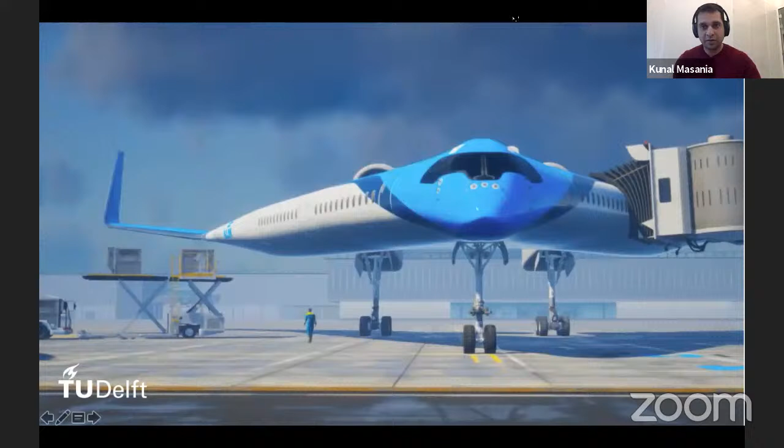So to start, a bit about where I am and why I am here. I'm at the Faculty of Aerospace, and it's a really interesting hotbed full of interdisciplinarity. We work together with experts in aerodynamics, stability, structures and materials, all towards a vision of CO2 neutral mobility.

And you see really cool concepts like the one I'm showing you. This is a Flying V, something we work on together in the faculty, where we hope that in the future we can bring sustainability to how we have mobility as a society.

And to realize these crazy structures, we have a lot of work to do. These things today remain difficult to manufacture. A really interesting opportunity is coming from the power of computational design.

There's a lot of really amazing work being done. I have two examples here. The first is a topology optimization from a group in Denmark, from Niels Aage and Ole Sigmund's research, where they used a supercomputer to put all the flight loads that might be experienced by an aircraft wing into a supercomputer, and to try to topology optimize what the internal structure of this aircraft part might look like.

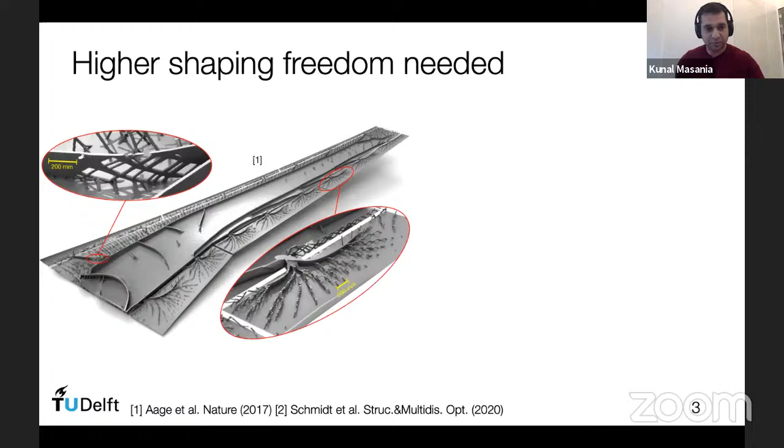And I hope you agree with me, it's quite beautiful. It's quite organic. The veins inside this wing concept look really, really amazing.

And also there's really amazing work done from Schmidt et al, published last year, researching topology optimization of this aerospace bracket. It's quite a famous concept for people who work on additive manufacturing or topology optimization. It's a GE bracket, and here you see really amazing stress lines flowing through the structure in quite an organic way, where you see the density changing locally.

And the challenge today is that these remain unmanufacturable. It's very hard to go from the traditional composite manufacturing process we have to these kind of topology optimized and structure optimized designs. And when I look at them, I immediately think of natural materials.

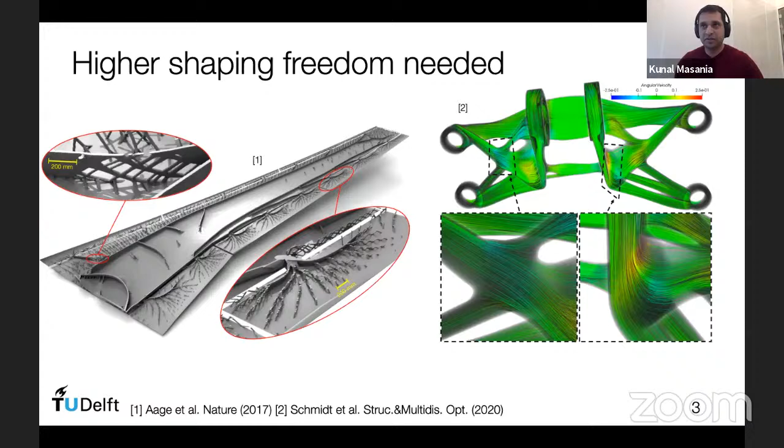So that's what we do in our research. We also look at how natural materials structure themselves. Here are two nice examples: one is wood on the left.

So for those of you who are in the Netherlands right now, this is actually how the trees in Netherlands look today, because it's windy like hell today. And also bone on the right.

And if we zoom in a bit on bone, and this is also common for wood, you notice something interesting about the structure. What you notice is that there is a hierarchical structure, structured from a very simple chemistry, a very simple molecule. But by utilizing structure at multiple length scales, you start to build up something which is macroscopically recognizable and has very high structural efficiency.

And some of the cool principles of natural materials are that they don't rely on chemistry. They rely on the structure of the hierarchy to give their high mechanical properties. And also there's a lot of details beyond just fiber orientation happening inside these structures.

So they readily incorporate different density of fibers, different orientation, also matching porosity into the structure. And even beyond that, they do really amazing things like being able to reconfigure the material, so as the demand of the structure is changing through a lifetime, then the structure is adapting. These are inspirations that we're really excited about, maybe trying to adapt into our manufacturing principles for the future.

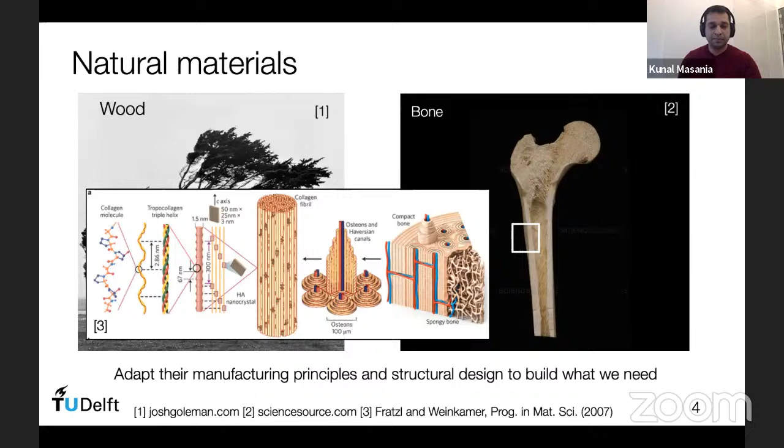So in my group, we work on three core pillars of research. The first is that we try to apply the natural design principles of biological materials into synthetic materials.

And here in the gray, actually behind, you see on the top images of biological nacre. So this is a seashell, at 3 different length scales, and below it you see the synthetic version that we make.

And what's special about our material here is that we can build at the same length scale as the biological one, so we can study directly the design principle that nature is using, and we do it with synthetic materials. So actually our material is as good as carbon fiber composites in terms of strength and stiffness, even though we build with nanoparticles.

Then I work also in our group a lot on biologically fabricated composites. We approach this from two different avenues. The first is top down. What I mean by that is we use wood or natural plant fibers, and we process them into something that is more recognizable for us as composite manufacturing specialists. So we make semi-finished materials, which can then be processed into structural composites.

To give a small example, we can make composites which have stiffnesses up to about 70 gigapascal and strength of about 600 megapascal. These are better than conventional metals, better than glass fiber composites, as well as being much more sustainable for the future.

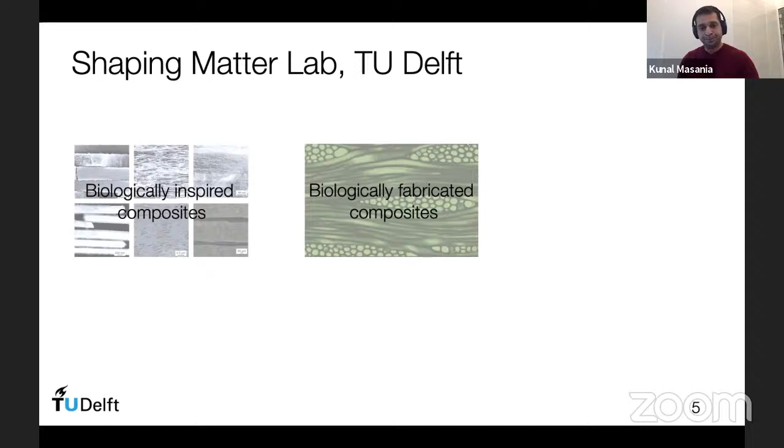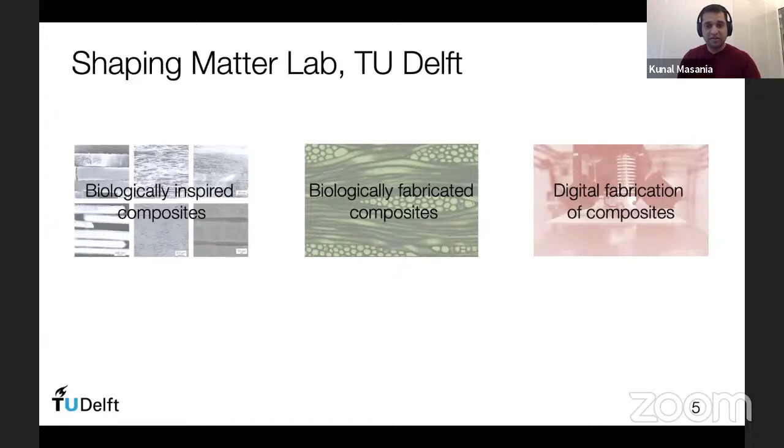We also work on aspects which are bottom-up fabrication. So we try to start with the basic building blocks, and we try to let nature do the work and structure the material for us. The last pillar of our group is digital fabrication, so we try to use data to inform the manufacturing process. Behind me in the picture, you see a 3D printer. The topic I'd like to tell you about today is one of our approaches, how we try to leverage shaping freedom to get high mechanical properties for composites using 3D printing.

Typically what people do with polymers is try to avoid anisotropy by trying to have high temperatures in the build volume and reducing molecular orientation during 3D printing. We thought, well, instead of trying to combat this problem of 3D printing, why not try to use it as a feature? So what we came up with was the idea to print a liquid crystal polymer.

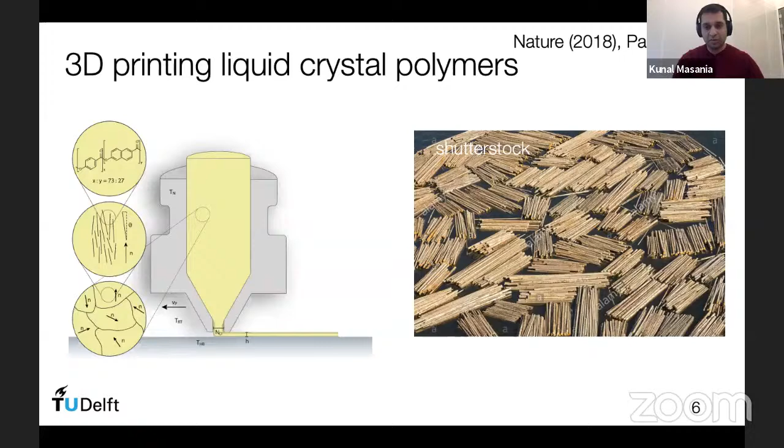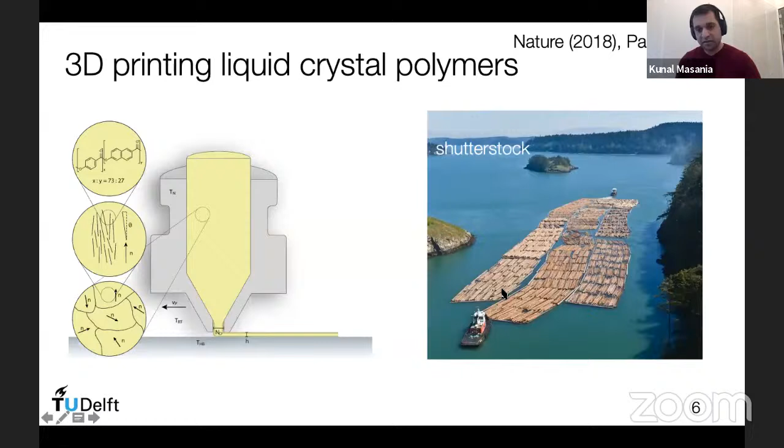That is, when you apply heat to thermotropic LCPs and you apply shear, you can create orientation in the materials. Here I'm just showing some logs in a sea, and you can see through the constriction they orient. For us, we hope that with printing, similar approaches can happen.

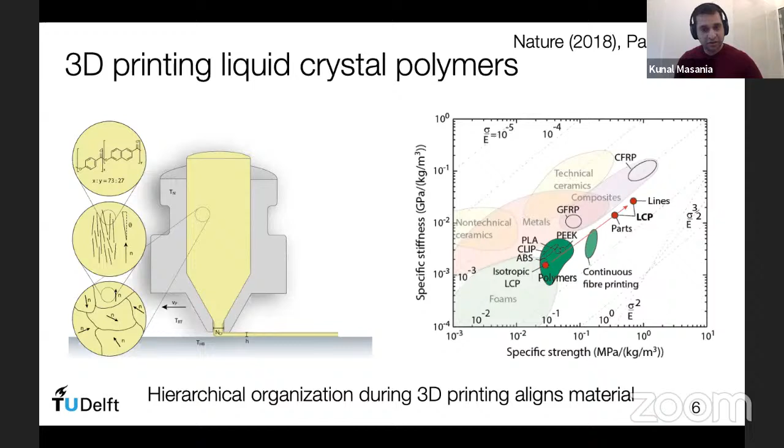And it's about 10 times stiffer and 10 times stronger than PEEK as a raw material in the end. We can really utilize this shaping freedom that you can get from 3D printing. So here is an inspiration: the example of wood.

What we can do is follow stress lines around a hole. But as you might know from other composite manufacturing technologies, you can't change the spacing of the lines locally, so you cannot fill with material. Whereas in our case, because we print a polymer, the polymer is self-assembling, and we have building blocks at nanoscale. So we can easily change the density of our lines around holes.

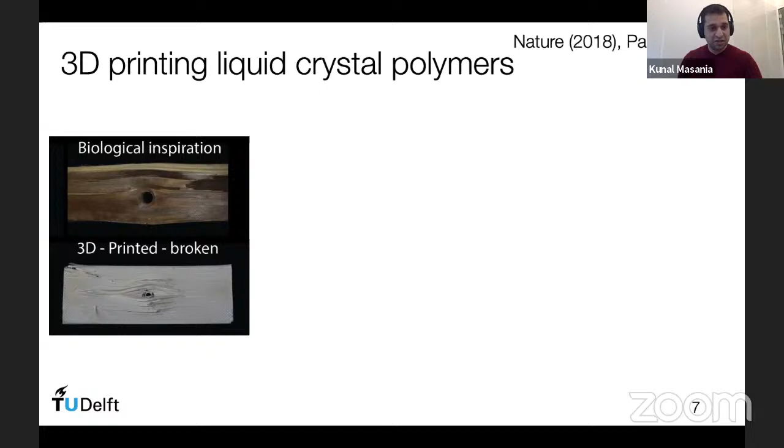What this means is we can go from something which is quite low in strength and stiffness as an isotropic material into something that becomes very, very stiff and very strong in the end. So we're talking about open hole strength of around 370 megapascal and stiffnesses of around 25 to 30 gigapascal.

I want to show you another interesting example. We've done an optimization for fiber path trajectories. Here you see a typical plate, and we want to analyze a problem for buckling, so when the plate loses stiffness when you apply a compression load. Here I show the enhancement of buckling load with respect to how much curvature you give, how much shaping freedom you add to this plate.

I also indicated below typically what happens with quasi-isotropic laminates or for tape laying, which is today's current state of the art. What we notice is with LCPs, you have a much higher shaping freedom—a curvature of 500, which is way off the chart in this case. It seems to indicate that even with a less performant raw material, just by having more shaping ability, we can take on other types of applications where traditionally we were using more energy intensive materials.

This kind of leads to the idea of being frugal with the material we have, using it only where we need it in the right orientation, and therefore using resources to a much lesser extent.

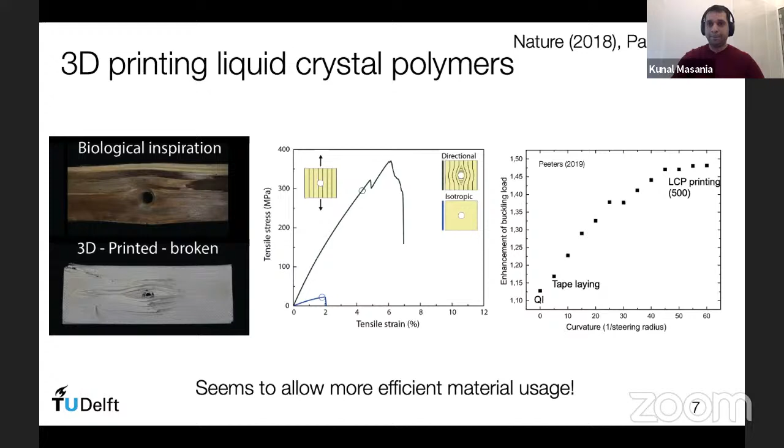This work was published in 2018, and in 2020 a startup was formed from our old research group. They're called Nematx, and they've been pioneering the industry application of this kind of 3D printing process.

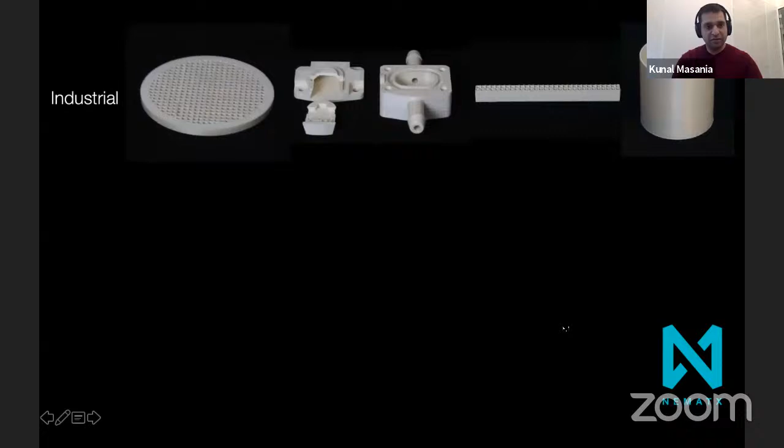I want to show you some of the parts that they've been manufacturing for industrial applications—you see some examples there. They've also been manufacturing aerospace components because the material has really high thermal stability and really high chemical resistance, and also components for the biomedical sector.

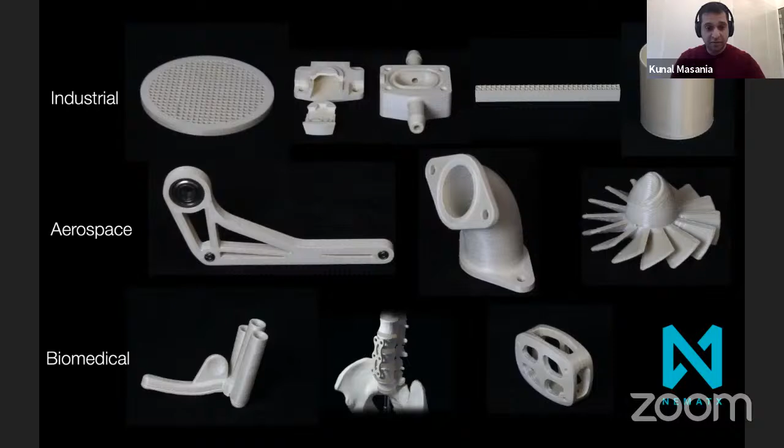Last year they won the Formnext Startup Challenge, so I'm really excited for them because they've had an amazing start to this journey. And last year they also won a grant to send the material to the ISS.

So the idea is that we send samples to space. They will be conditioned outside of the International Space Station, and then we would retrieve them to understand how the properties are going to change due to this low atmosphere and also UV degradation from being in space.

For me, it's really insane, and it's the perfect example of circular material, because anything you send to space has to be reused and used again.

It's an opportunity where in the future we can maybe 3D print things, and then at end of life, we can chop them down, reproduce filaments, and reprint new structures. From the early experiments we've done, we found that up to 5 times recycling, you don't really lose any mechanical properties from the material, which is really, really nice.

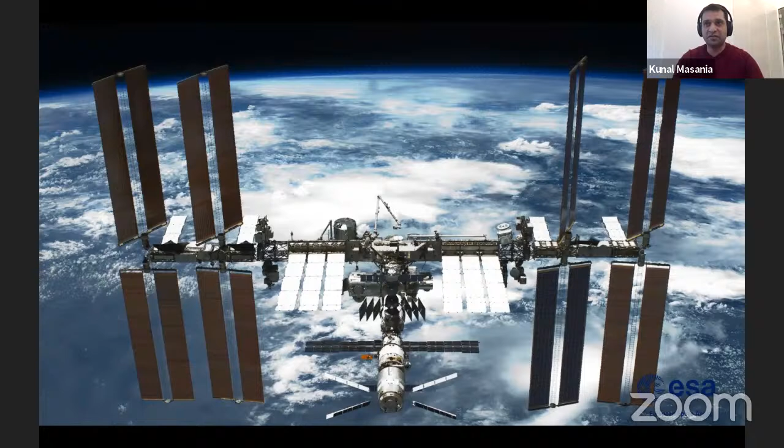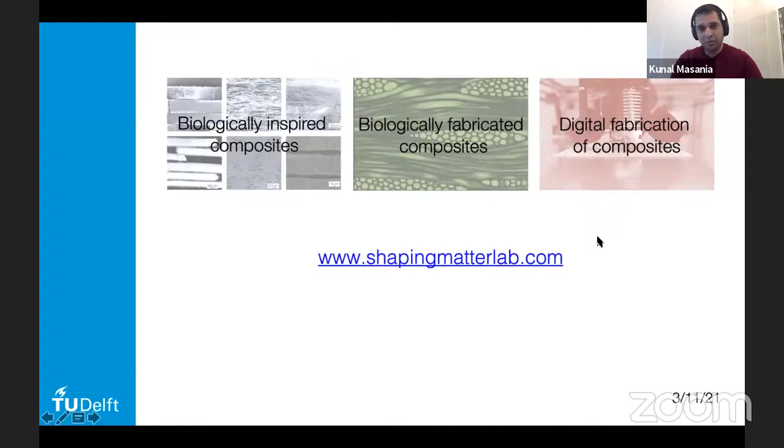Good, so with that I'm already at the end. Sorry, I took a bit longer. I couldn't tell you everything I did, but please look at our website and you will find more information on the other research that we are doing.

Thanks, yeah, and thanks, sorry for taking so long. No, thanks Kunal, that's perfectly fine. So I have one question there.

So to understand it right, you use LCPs, and during the printing, I guess what you're saying is you orient the molecules in a way that they become like fibers, but not really like a fiber. That's exactly correct—on the molecular scale, they orient to the direction of the 3D printing. If you don't cool down the prints, then you go back to an isotropic material, and if you cool down the prints quickly, then you can preserve the anisotropy inside the structure.

Okay, so it's heating during the printing and then cooling down to freeze, let's say, this orientation. And how far is this—if you think about making this on a larger scale, is it difficult to do, or what are the technical challenges to scale this up?

So the material was developed in the 80s and already has a lot of commercial applications. In fact, all of you that have a mobile phone, you have LCP with you, because it's used a lot in the electronics industry as a cable connector for solder reflow processes. So it's a really good, well-established material—we don't expect problems for scalability.

Good, okay, I want to move to the next subject, which is about sustainability.